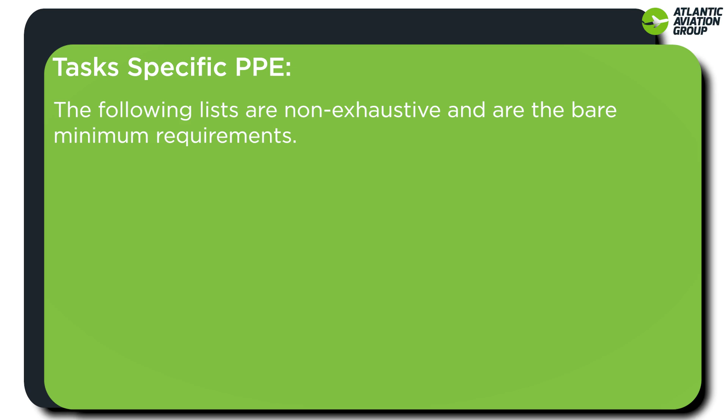Task-specific PPE: the following lists are non-exhaustive and are the bare minimum requirements. Safety glasses are required when cutting, sanding, grinding, or removing panels, wing to body, sidewall, and ceiling.

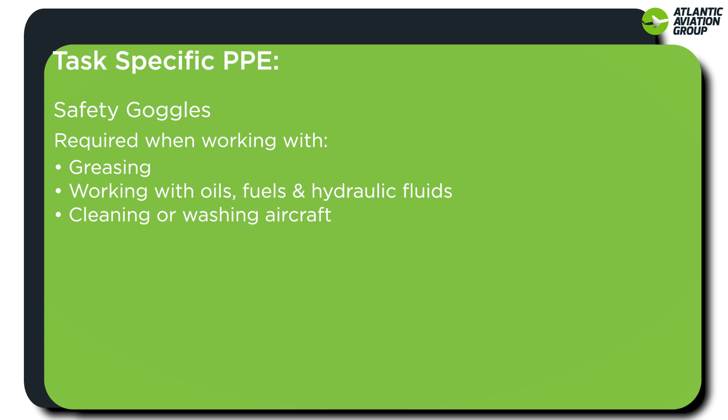Safety goggles are required when greasing, working with oils, fuels, and hydraulic fluids, cleaning or washing aircraft, or painting or spraying.

Ear defenders are required when exposed to unavoidable noise levels that reach or exceed 85 decibels, or when you cannot hold a conversation with somebody that is 1 meter away from you without raising your voices. They must be used during engine runs, during riveting, and during aircraft landing and takeoff.

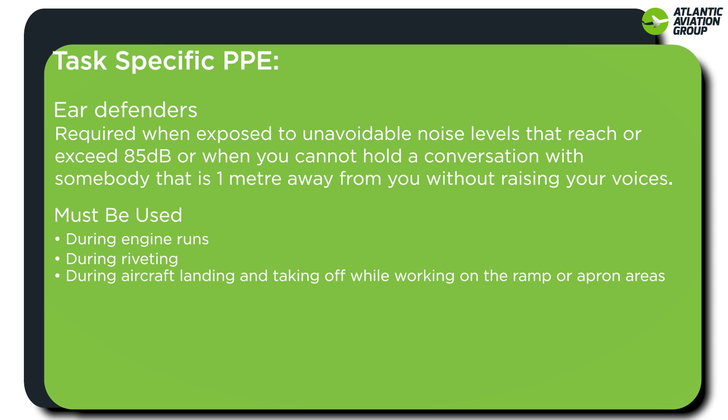Ear defenders must also be worn while working on the ramp or apron areas, while working in the sanding room with sanders and extraction systems running at the same time, while running noisy equipment such as a start cart or bandsaw, and while working in noisy environments, for example cargo bays with circulatory fans running.

Gloves. Various types of gloves are available for your protection depending on the task you're carrying out. Butyl rubber gloves should be used when working with stronger chemicals and are mandatory while paint stripping and working with Alodine. Nitrile rubber gloves should be used when working with paints, primers, and other light tasks where the skin needs to be protected.

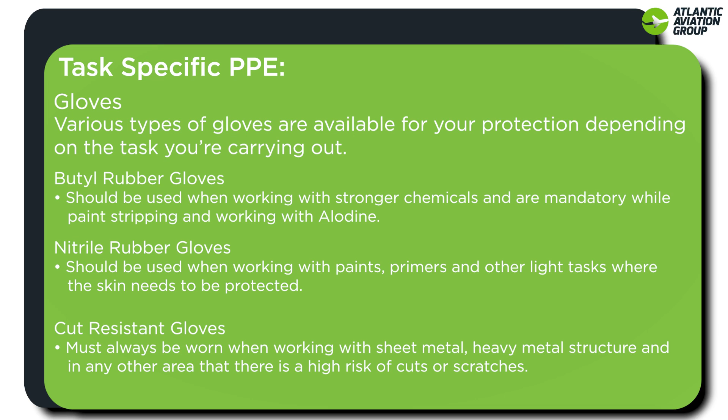Cut-resistant gloves must always be worn when working with sheet metal, heavy metal structure, and in any other area where there is a high risk of cuts or scratches.

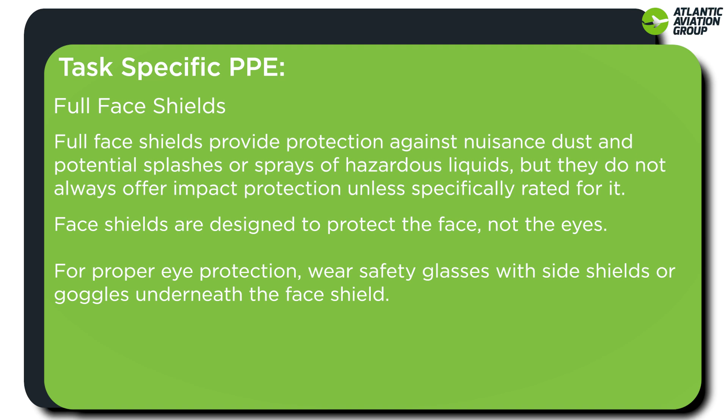Full face shields provide protection against nuisance dust and potential splashes or sprays of hazardous liquids, but they do not always offer impact protection unless specifically rated for it. Face shields are designed to protect the face, not the eyes. For proper eye protection, wear safety glasses with side shields or goggles underneath the face shield. Full face shields are a required component of the personal protective equipment for tasks such as paint stripping and Alodining.

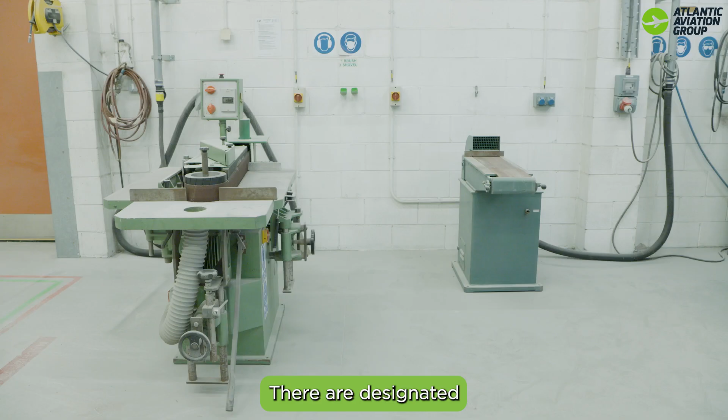Sanding: we ask that where possible all sanding be carried out in the designated sanding room. There are designated sanding areas within the facility, in the composite workshop, sheet metal shop, panel shop and paint shop. If a sanding task needs to be performed outside of these areas, consult your supervisor for the specific requirements.

FOD, foreign object debris, refers to any object found in an inappropriate location within the airport environment that has the potential to cause injury to airport or airline personnel or damage aircraft.

Reasons to avoid FOD: injury prevention, as loose objects can become dangerous projectiles, risking injury; and aircraft safety, as debris on runways or ramps can damage aircraft, leading to accidents or costly repairs.

During your time at AAG, you have a role in preventing FOD. To reduce the risk of FOD at the airport, we should follow these steps: remove it and dispose of it in the bins provided, identify the source to prevent recurrence, and clean as you go at all times. It is your duty as an AAG employee to pick up any FOD that you see.

When towing aircraft up the line, ensure that there is no FOD on the back of the tug that may be lost on the runway. The apron is a high-risk area where all FOD should be placed in a bin as soon as it's found. FOD should not be allowed to accumulate in MUPs, and they should be cleaned at regular intervals.

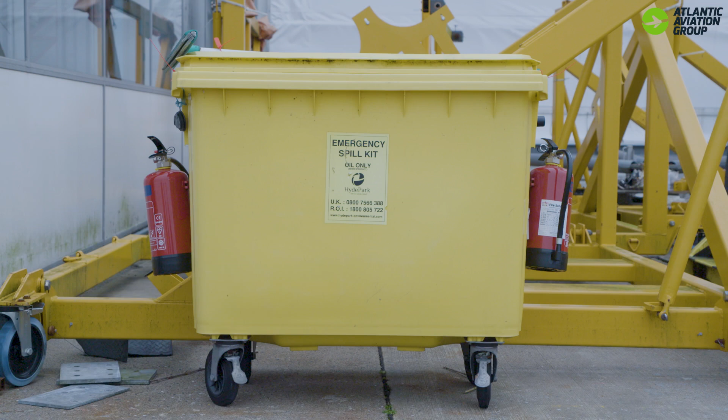Chemical storage and disposal. MEK, IPA, white spirits issued from stores must only be stored in the designated cabinets when not in use. Prior to use, these must be decanted into smaller containers and labelled. Labels are available from the tool crib.

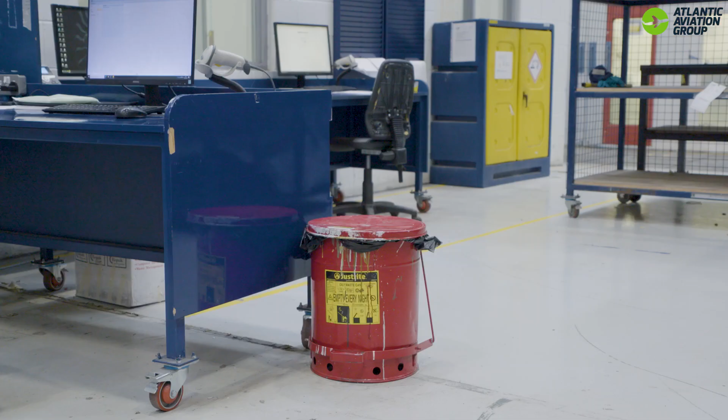All hazardous waste should be placed in the red hazardous waste bins, which are located at various locations around the facility. Yellow hazardous material storage cabinets are located around the hangar floor. All hazardous materials should be stored in these when not in use.

Work permits and safety protocols. If you are coming on site to carry out work under the supervision of the Facilities Department, you will require a permit to work prior to commencing. Permits are issued either on a weekly or daily basis depending on the task or tasks to be carried out.

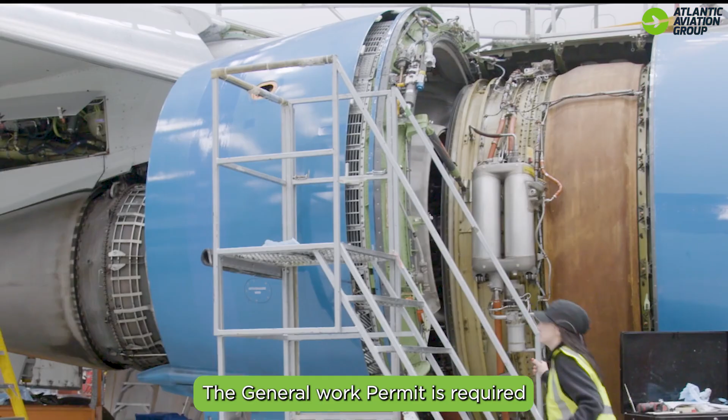The General Work Permit and Hot Works Permit are essential documents for maintaining safety and adhering to protocols on site. The general work permit is required for all types of work to ensure that safety measures are in place and that potential hazards are assessed and managed.

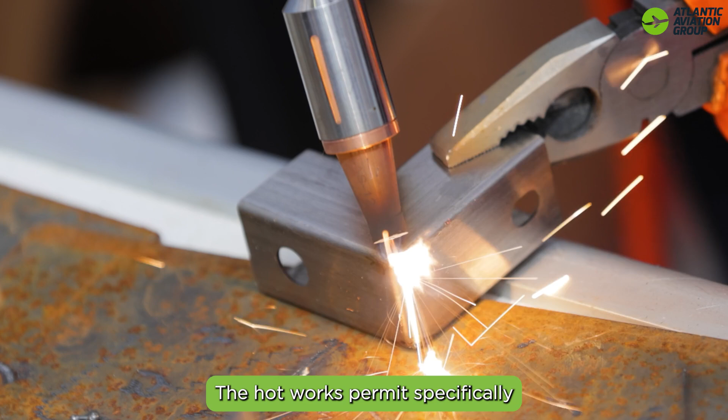The hot works permit, specifically needed for tasks involving open flames or heat such as welding or cutting, helps to mitigate fire risks and ensure that appropriate fire safety precautions are taken. Both permits are integral to maintaining a safe working environment and ensuring that all activities are carried out in accordance with established safety standards and procedures.

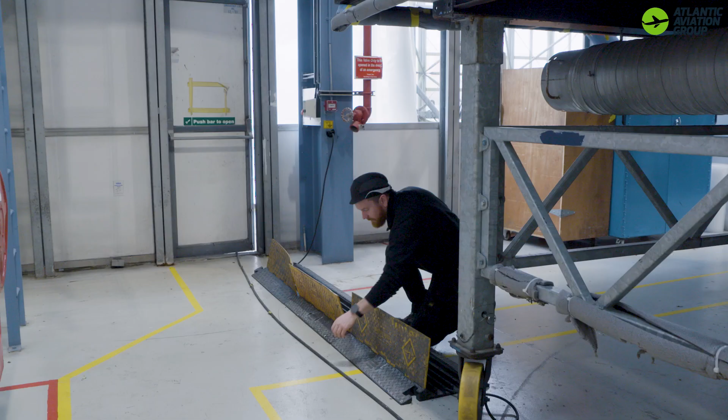Power leads, airlines, and other trip hazards. If you require a power lead or airline, we ask that you place them in the protective covers available to lower the likelihood of them becoming a trip hazard.

Emergency procedures and first aid contact. To locate a first aider, you may dial 222 from any fixed phone within the facility, which will alert the first aider on call, or contact your supervisor immediately. A list of first aiders are located at various points within the facility. Typical locations include hand washing areas, first aid box locations, and notice boards.

The first aid room is located on the main corridor next to the sheet metal shop. This is identified with over-door signage visible as you walk along the corridor. There are 3 defibrillators on site, and these are located at the first aid room, outside the main canteen on level 3, and in the security office at the main entrance.

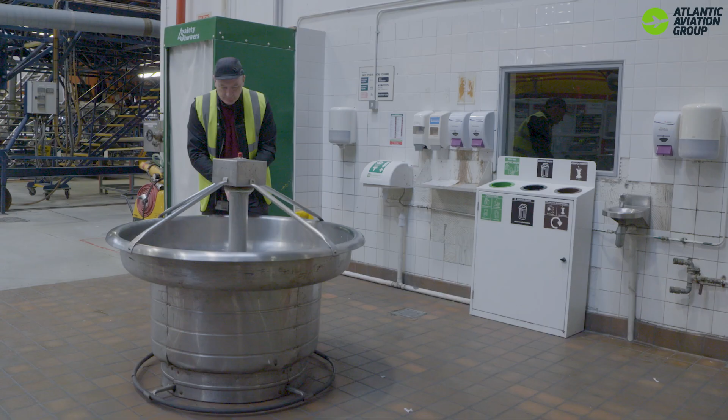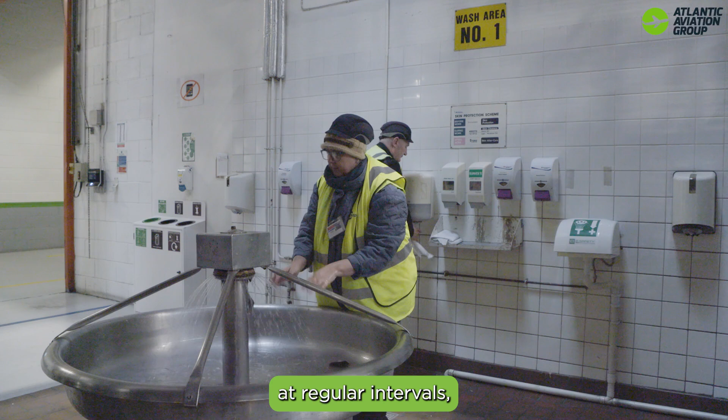Wash areas: there are 4 wash areas located on the production floor. At these locations, you will also find eye wash stations, emergency showers, and foot-operated hand washing facilities. These areas are cleaned at regular intervals, and we ask that when you use these areas, you leave them in a clean and tidy manner for the next user.

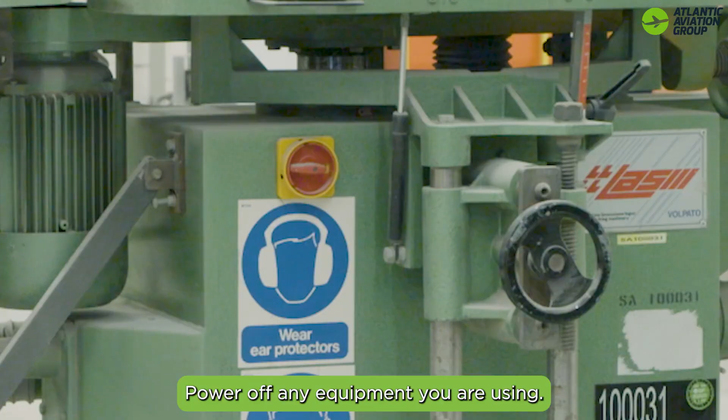In the event of a fire or evacuation, stop what you are doing, power off any equipment you are using, use emergency stops if needed to disable machinery, evacuate to the assembly points in the main car park or at the bike shelter, and on evacuation adhere to messages that will be played over the intercom at the security office.

Designated fire wardens will complete a sweep of the building and report to the evacuation coordinator at security. During a live evacuation, the cause of alarm will be investigated by the on-site emergency response team, who will relay detail to the facilities department and security. Once the investigation is complete and it's safe to return to work, you will be advised by security.

Reporting incidents and accidents. All incidents, near misses, and health and safety observations must be reported promptly to your supervisor or AAG point of contact. This will allow us to investigate and review procedures to reduce the chance of a reoccurrence. All accidents or incidents must be reported immediately to your supervisor or AAG point of contact.

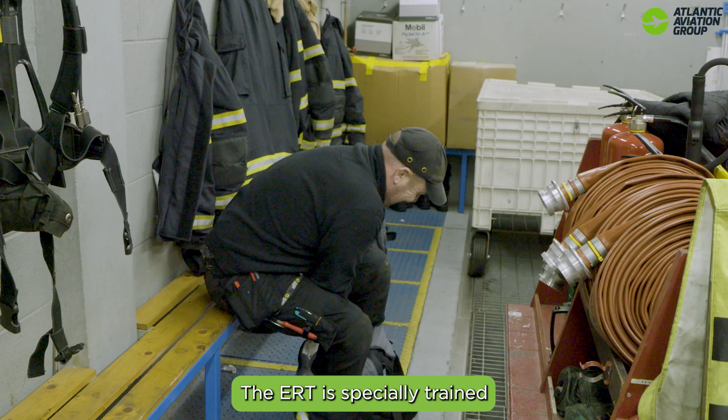Emergency Response Team, ERT. AAG have an on-site ERT. The ERT is specially trained in evacuation, search, and rescue procedures, and has certification to use specialised equipment like breathing apparatus. In addition, other emergency equipment, aside from standard extinguishers and hose reels, can only be used by trained members of the ERT. Summary of pedestrian safety, site traffic, and work protocols.

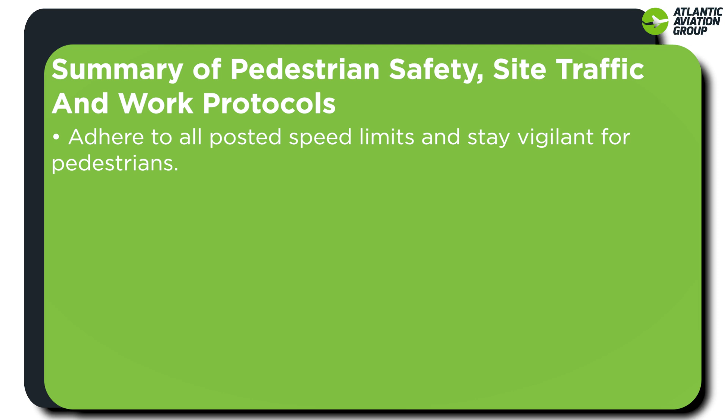Adhere to all posted speed limits and stay vigilant for pedestrians. Park your vehicle responsibly and avoid blocking accessways, doorways, or walkways. Check in with your supervisor or AAG point of contact each morning before starting work. Wear the required PPE, including safety boots, bump caps, and high visibility clothing in designated areas. Follow task-specific PPE requirements as outlined in the risk assessment or procedure.

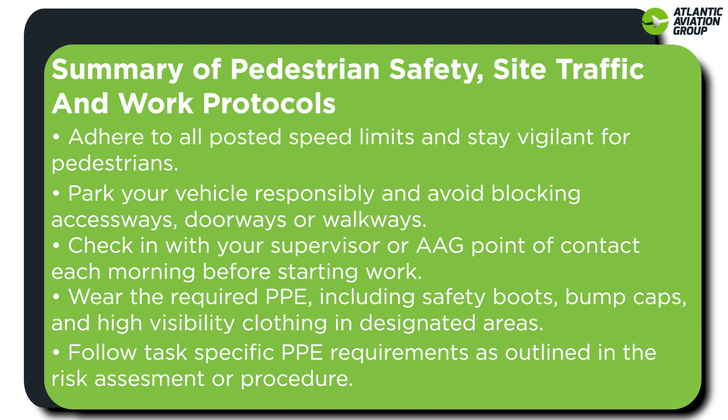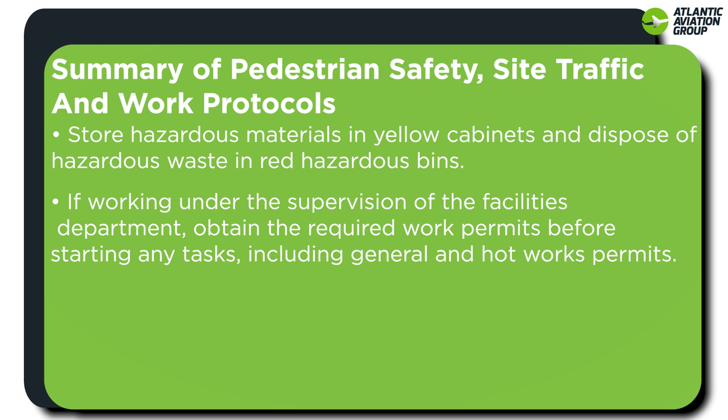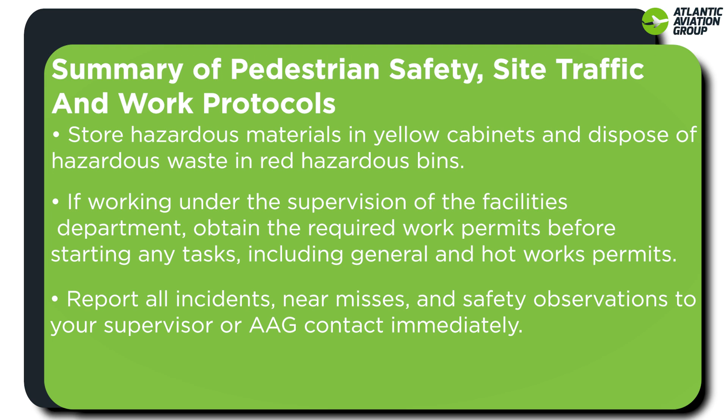Store hazardous materials in yellow cabinets and dispose of hazardous waste in red hazardous bins. If working under the supervision of the facilities department, obtain the required work permits before starting any tasks, including general and hot works permits. Report all incidents, near misses, and safety observations to your supervisor or AAG contact immediately.

Manual handling guidelines and safety. Manual handling is not just about lifting heavy objects. It includes any activity that involves using force to lower, push, pull, hold, or restrain items. If your job involves any of these tasks, you must complete manual handling training. Always seek assistance or use mechanical aids when moving heavy objects to ensure safety.

Equipment uses. Some equipment requires you to partake in specific training and be deemed competent prior to use. Some of this equipment includes tugs, forklifts, wing grip, gantry crane, hangar door and MEWPs. If you need training, please inform your supervisor so they can arrange it for you.

E-scooter and bicycle storage. Once you get to the main entrance, dismount and walk your e-scooter or bicycle to the storage shelter provided, to the right-hand side on the entrance as you approach the security office.

Work at height guidelines. MEWP use. You are only permitted to operate mobile elevated work platforms once you have completed the required training. If you have an in-date MEWP operator cert, you will still be required to take part in a practical assessment. This can be arranged by your supervisor or AAG point of contact.

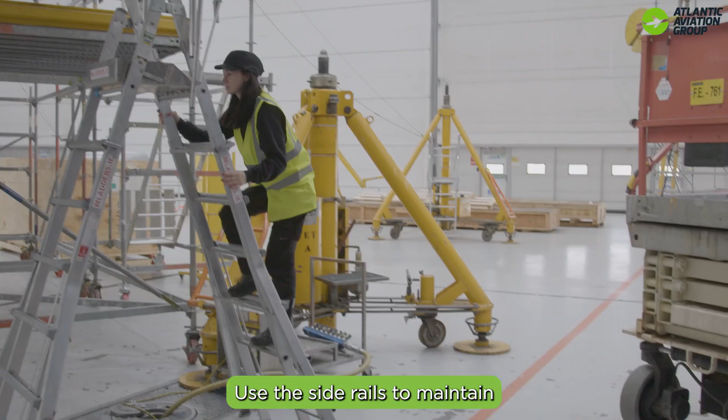Podium steps. Follow the step-by-step guide provided for safe use. Take steps to the work area. Once you're happy the podium is in the correct position, use the side rails to maintain 3 points of contact while climbing and ensure that you only work from the platform and not the rungs. When on the platform, immediately close the gate. Ensure the lock is put in the correct position. Never overreach outside the cage area or stand on the rails to gain additional height.

If there is ever any doubt around AAG safety procedures, ask.

A-frame ladders. A-frame ladders are only authorised for use on the upper deck of the aircraft. Before use, it is the user's responsibility to confirm that the most recent inspection has been completed. This biannual inspection can be verified by checking the colour displayed on the access equipment board located in the main corridor.

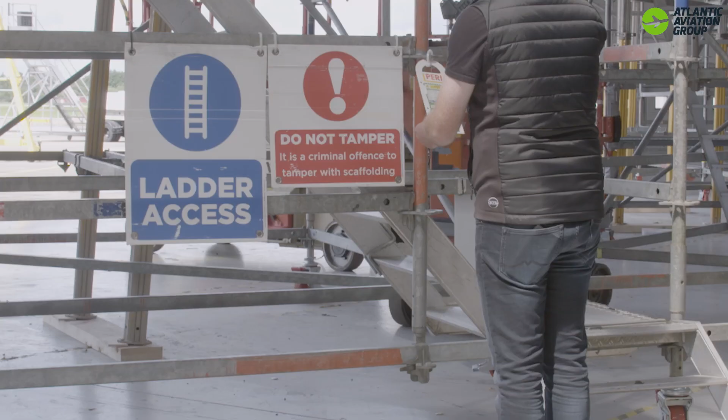Scaffolding and docking. Always check that the inspection tag is valid before use of scaffold and inspection sticker on docking.

Apron access. Apron access is restricted and high-vis clothing must be worn. AAG access to the aerodrome and runways is by taxiway golf. There is a red and white line across this taxiway which you will require permission from the airport to cross with vehicles, aircraft or as a pedestrian. There is also a physical barrier which can be placed or removed by the Shannon Airport Authority. This is usually done during Category 2 procedures.

Summary of the safety and operational guidelines. Manual handling includes lifting, pushing or pulling. Training and mechanical aids are required for safety. Equipment use: tugs, forklifts, wing grip, and MEWPs. Gantry crane and hangar door require specific training before use.

E-scooter and bicycle storage, located in the bicycle shelter within the main car park. Work at height: MEWP and podium steps require training. Follow safety steps like 3-point contact and no overreaching, and a harness is required at all times when operating a MEWP.

Apron access. Observe restricted access to the taxiway for safety compliance.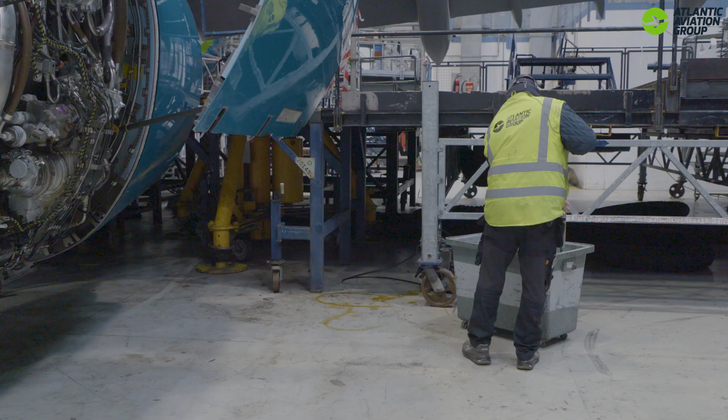Spill kit availability and use on the production floor. If you cause or see a spill, use the spill kits available to clean. Spill kits for larger fuel spills are available on the apron and in areas A and C on the production floor.

Guidelines for using the canteen and break room areas. Eating is only permitted in the available canteen and break room areas. If you use the provided canteen area, you are asked to leave them in a tidy condition and report any issues to your AAG point of contact. Clean up any spills as soon as possible to maintain a clean environment.

Bathroom cleanliness. Bathrooms are cleaned at regular intervals throughout the day. You are asked to leave bathrooms in a tidy condition and as you would expect to find them. Please report any issues to your AAG point of contact.

Environmental responsibility and waste management. Personal responsibility: we all have a responsibility to ensure that environmental protection is a consideration in all projects and activities on site. Waste management: any waste generated during your time on site must be disposed of properly, following the site's guidelines and procedures.

Smoking and vaping policy. Smoking and vaping are not permitted inside the AAG building or at any access points. These activities are only allowed in the designated smoking area, located at the front of the building at Block 2, adjacent to the paint shop.